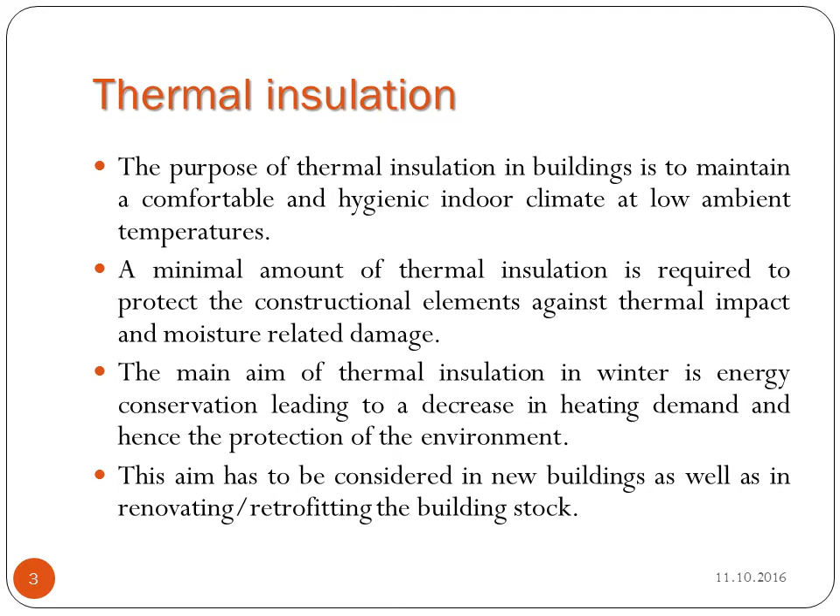Why is thermal insulation important for civil engineers and the public? Half of the energy we use to heat or cool our homes can simply leak out without insulation. Insulation helps to save money on energy bills, reduce energy use and lower greenhouse gas emissions, reduce reliance on heating and cooling systems, and finally, improve comfort.

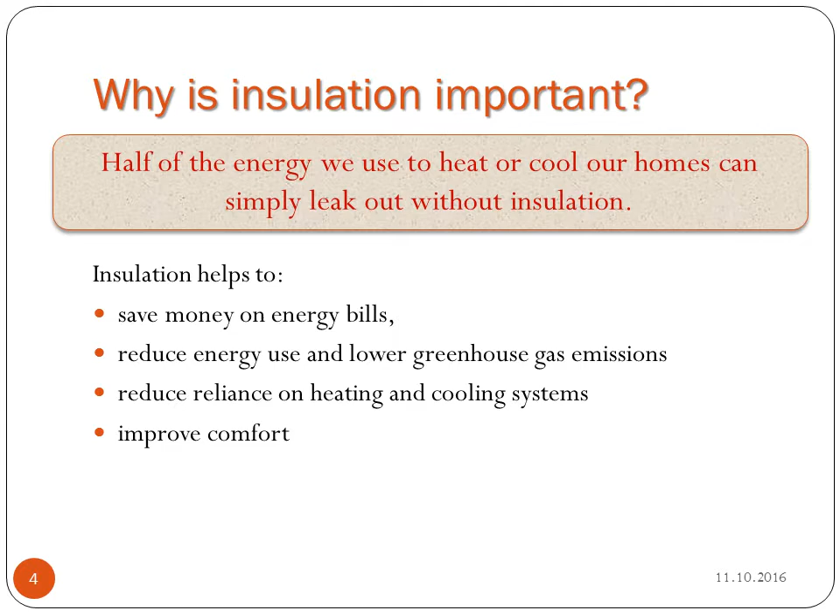Let's try to recall from the previous courses the terminology about heat transfer from materials. Thermal conductivity is a property of a material and is defined as the amount of heat energy transferred per unit thickness for a given temperature difference, expressed in watts per meter Kelvin. The lower this value, the more energy efficient is the material. However, the thermal conductivity of a material is affected by density, moisture, and temperature of the material. When the material is moisture saturated, the thermal conductivity is increased.

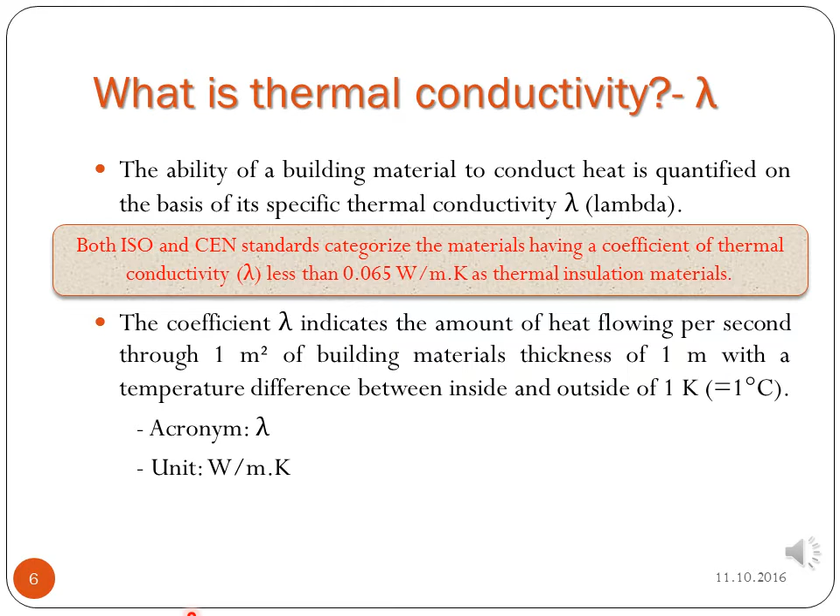The lower the coefficient lambda, the better is the insulating material.

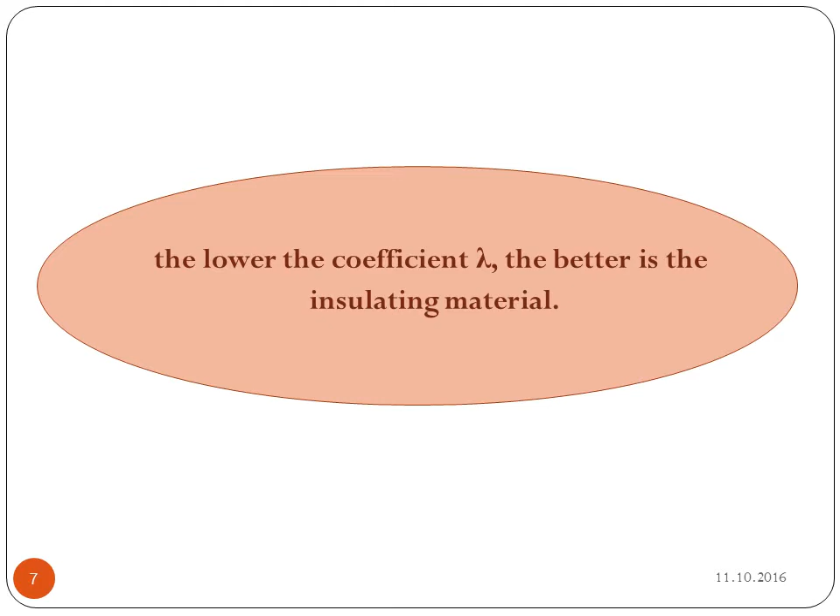As long as we understand the meaning of lambda, now it is easier to learn about the U values. If you did not catch the definition of lambda from the previous slides, please watch carefully again while taking notes. Now let's define the U value. U value is the measure of the rate of heat loss through a material for 1 degree difference in temperature at either side of the material.

As it can be understood from the definitions, thermal conductivity is a typical material property, while the U value can be calculated for structural members having different widths and/or for composite structural members made of different materials. The calculation of U values can be rather complex. The U indicates the flow of heat transferred from the inside out through an area of 1 square meter and a temperature difference of 1 Kelvin. Once again, the acronym is U and the unit is watt per square meter Kelvin.

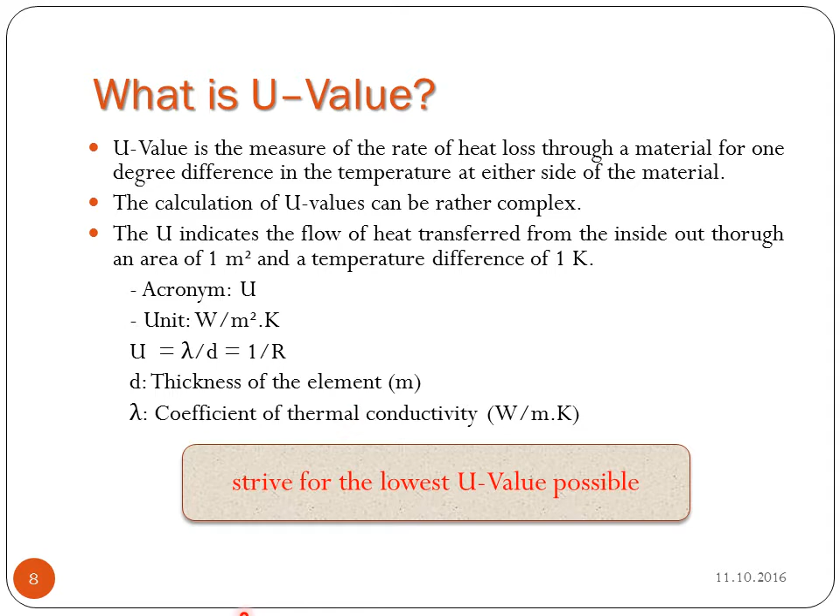That's a necessity for proper heat insulation. It is to strive for the lowest U value as possible. The lower the U element in the structure, the less is its heat loss.

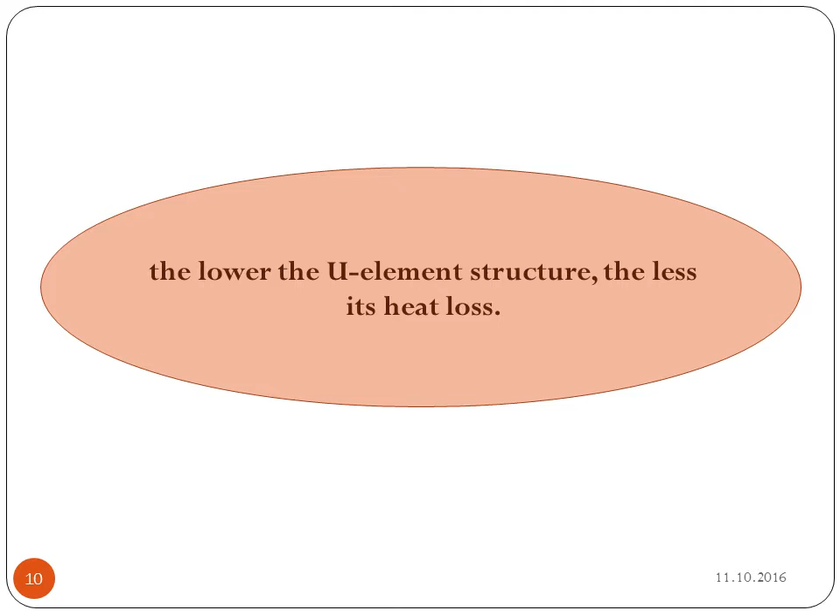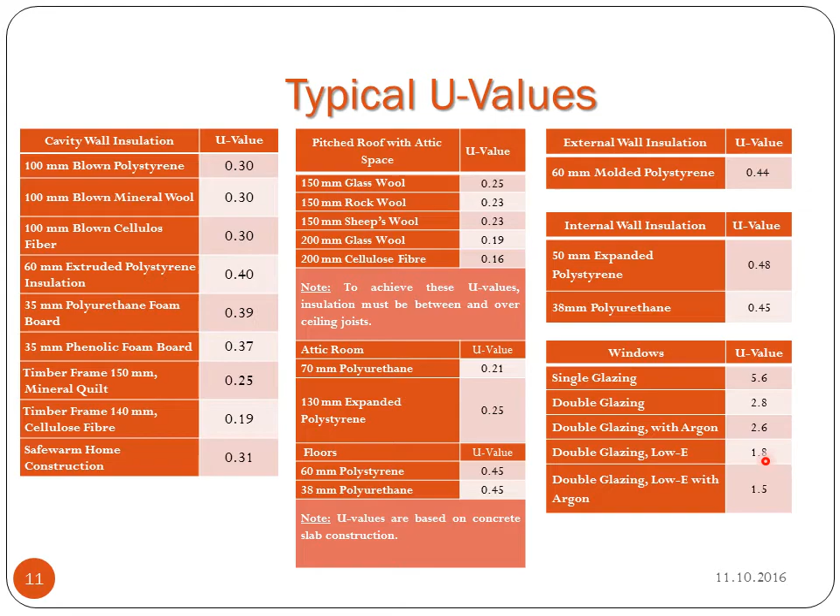Another important point to mention here is the high heat flow capacity of windows. You can see that the U value for single glazing is 5.6 watt per square meter Kelvin, while this value may be reduced up to 4 times by double glazing energy-saving argon types.

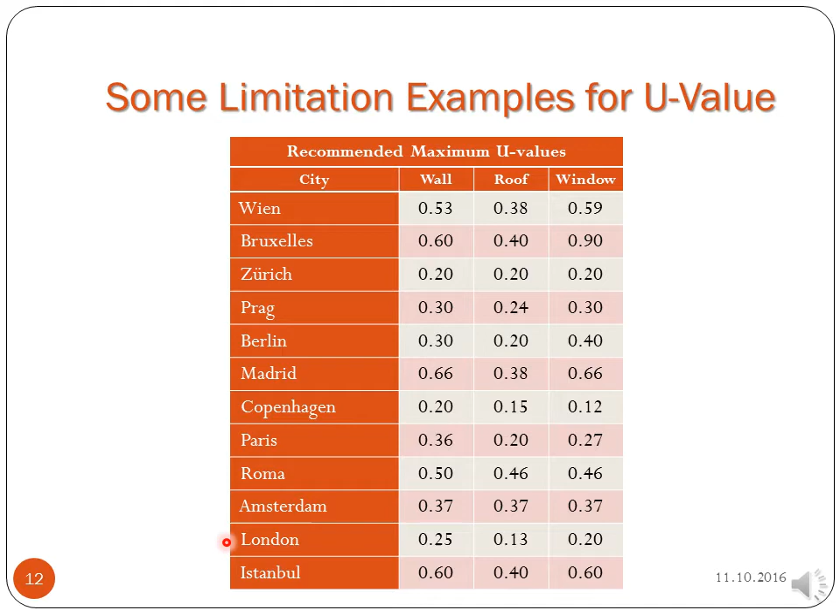Let's define the thermal resistance or R value for structural members. Within the building, there is a transmission of heat from the heated indoor air to the cold outside, for example, through the walls or through the roof. Insulation's ability to resist heat flow, preventing heat leaking in or out, is described as R value. Insulation products with the same R value will provide the same level of insulation if installed correctly. The level of insulation needed will depend on the type of building and the climate zone.

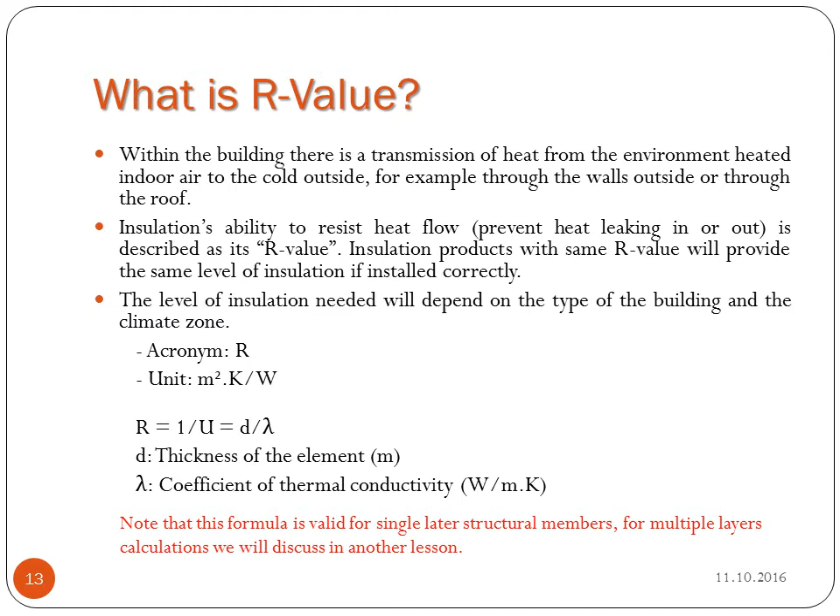Here you can see that thermal resistance is equal to 1 over U value, which is the thickness of the element divided by its thermal conductivity value. The thermal resistance has a unit of meter square Kelvin per watt, and the thickness of the element is measured in meters, and thermal conductivity is watt per meter Kelvin. This formula is valid for single structural members. For multiple layer calculations, we will discuss in another lesson.

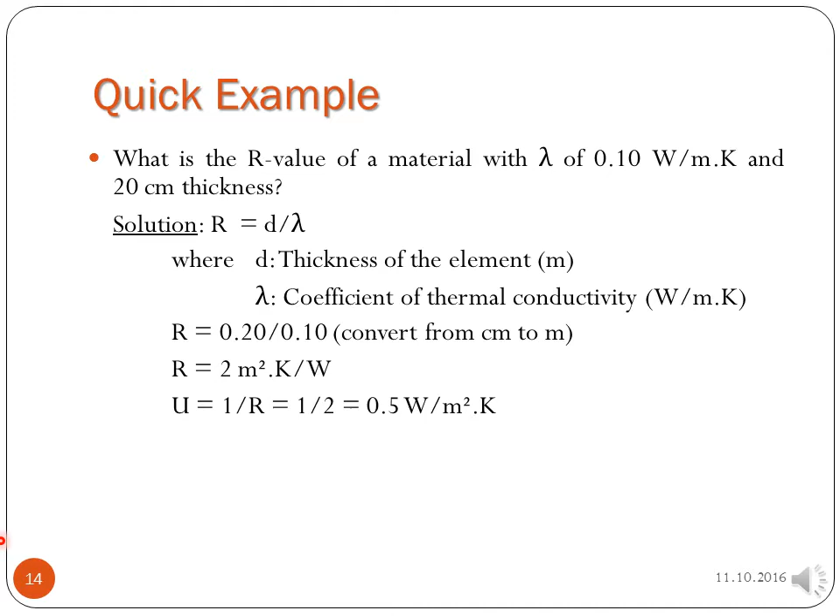Now it's a question of when to insulate buildings. The best time to install insulation is when you are building or renovating. Insulation should be combined with good design, including passive heating and cooling, so it can do its job properly, keeping you comfortable all year round.

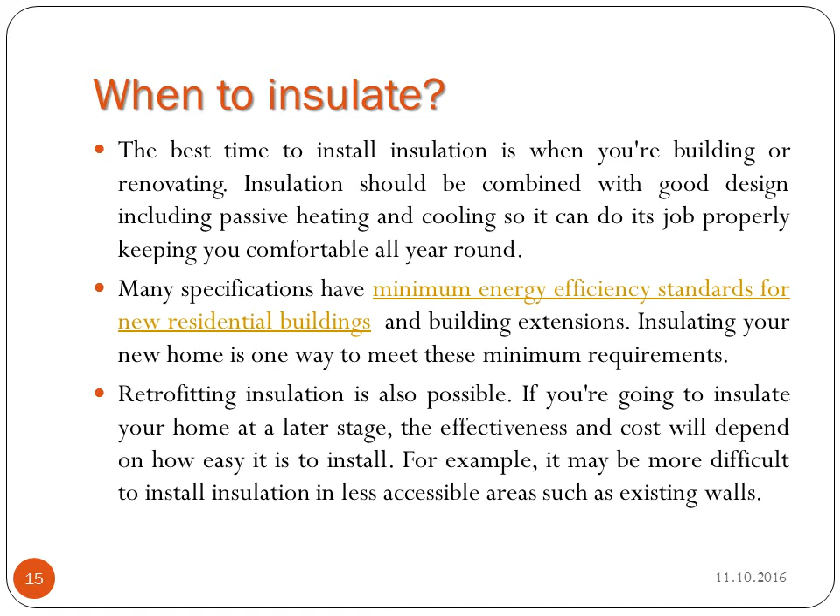Many specifications have minimum energy efficiency standards for new residential buildings and building extensions. Insulating your new home is one way to meet these minimum requirements. Retrofitting insulation is also possible. If you are going to insulate your home at a later stage, the effectiveness and cost will depend on how easy it is to install. For example, it may be more difficult to install insulation in less accessible areas, such as existing walls.

Now let's talk about, one by one, some typical insulation materials and their important characteristics.

How to choose the best material for insulation depends on the knowledge about the types of the materials, the intended use, and the type of construction, and of course, on economic considerations.

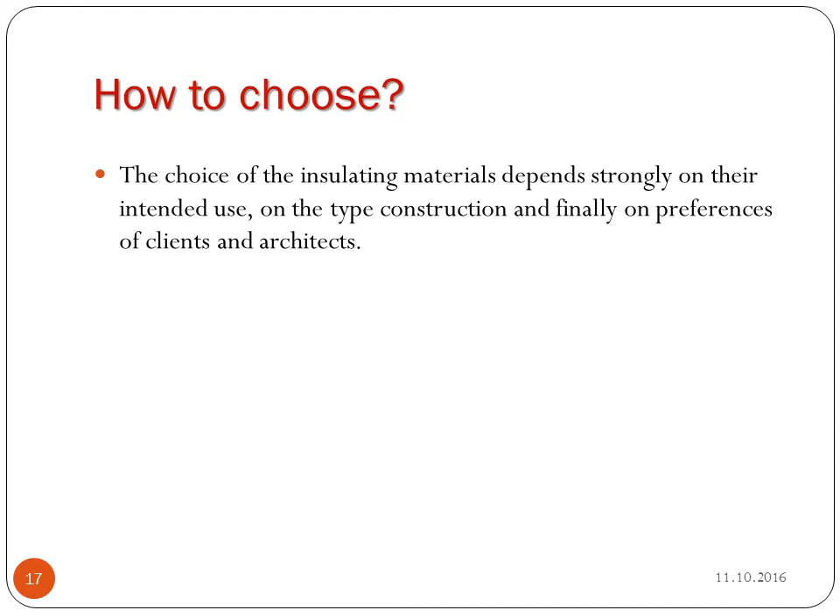Expanded perlite is used as a light granular insulation to fill cavities, such as insulation of cavities between the rafters or the insulation of ceilings, granular insulation under the concrete floor, and granular insulation of floors, filling padding between wood. Expanded perlite can also be used for the production of thermal insulation mortars and plasters.

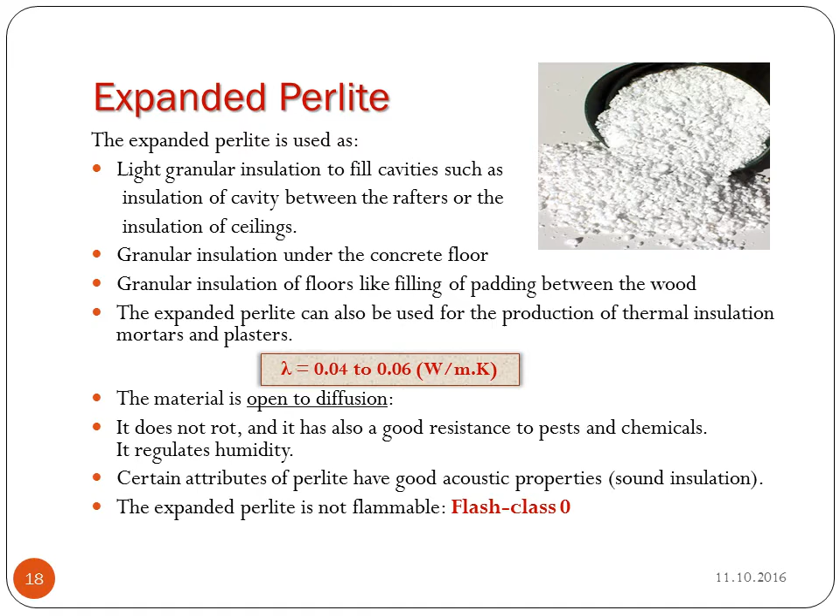Its lambda value is between 0.04 to 0.06. The material is open to diffusion. It does not rot, and it has good resistance to pests and chemicals. It can regulate humidity. Certain attributes of perlite give it good acoustic properties, making it a good material for sound insulation. Expanded perlite is not flammable.

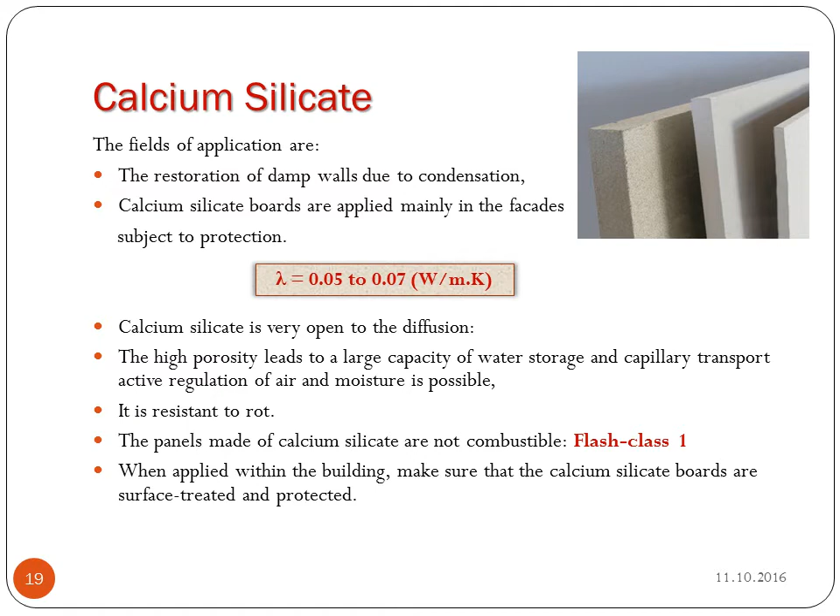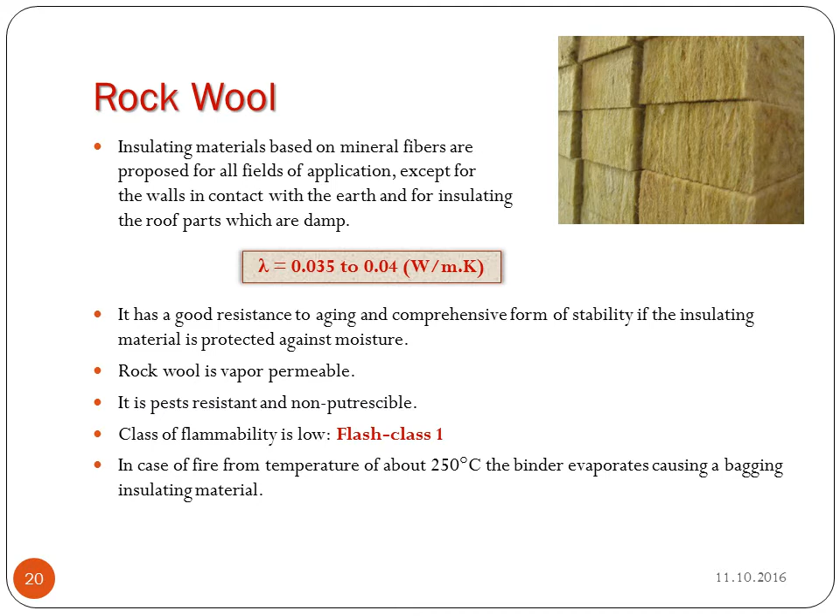Rock wool. Insulating materials based on mineral fibers are proposed for all fields of application, except for walls in contact with the earth and for insulating roof parts which are damp. Its lambda value is between 0.035 to 0.04 watts per meter Kelvin. It has good resistance to aging and comprehensive form stability if the insulating material is protected against moisture. Rock wool is vapor permeable. It is pest resistant and non-putrescible. Class of flammability is low. In case of fire, from a temperature of about 250 centigrade degrees, the binder evaporates, causing a sagging insulating material.

Basaltic rock wool. Thermal insulation of pipes, equipment, tanks, boilers, furnaces, fireplaces, and components of gas turbines are possible with basaltic rock wool. It also has a specific use in soundproofing industry. Its lambda value is between 0.038 to 0.055 watts per meter Kelvin. Class of flammability is low. The fibers of basaltic rock without a binder are combustible.

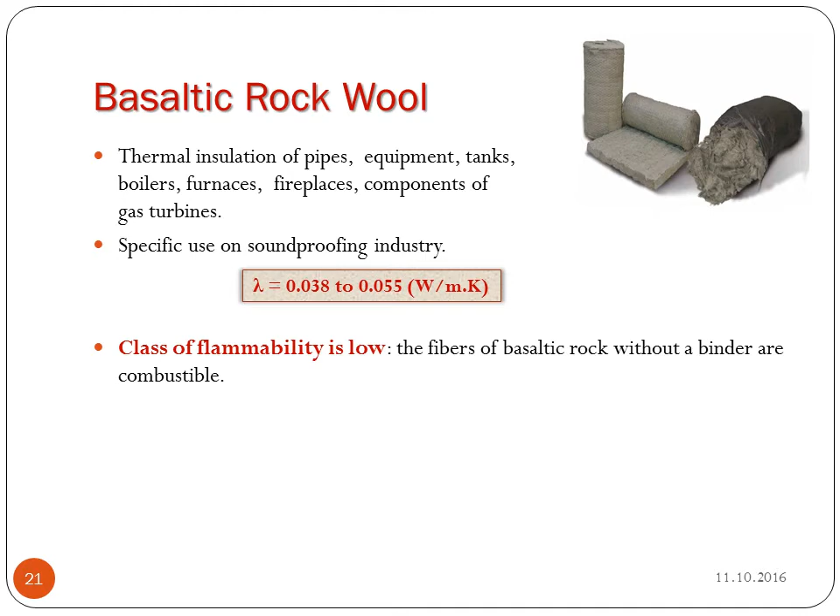Cellular glass. Cellular glass is particularly suitable for insulation of outside walls in contact with the ground, under the foundation, on terraces, or on flat roofs, and in general in all parts of the building susceptible to moisture. It's also suitable for internal insulation. Its lambda value is between 0.04 to 0.05 watts per meter Kelvin. It does not absorb any moisture. It's resistant to frost and weather conditions, and its compressive strength is high. The panels are relatively light and non-flammable, non-putrescible, and resistant to organic solvents and acids.

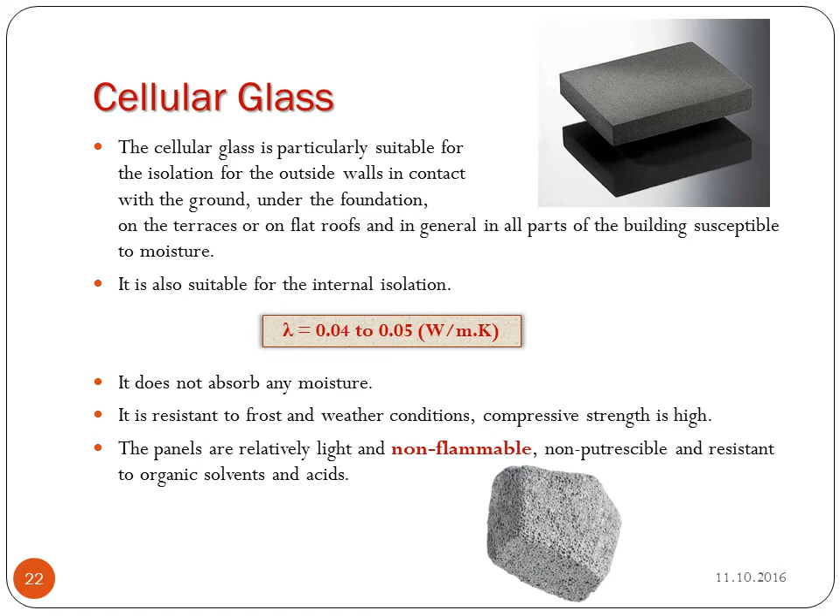Wood fiber panels are supplied in thicknesses from 10 to 100mm for internal or external use. It's open to diffusion and its installation is quite fast. Insulation panels are used for insulation above or between the rafters of the roof, wall posts, wooden beam ceilings, and walls for suspended facades and partition walls. Compared with other insulation materials, it results in a higher capacity of storing heat. Its soundproofing properties are appreciable. In points at high risk of moisture, wood fiber panels having hydrophobic properties are preferred, with the addition of natural resin rather than bitumen. It's flammable.

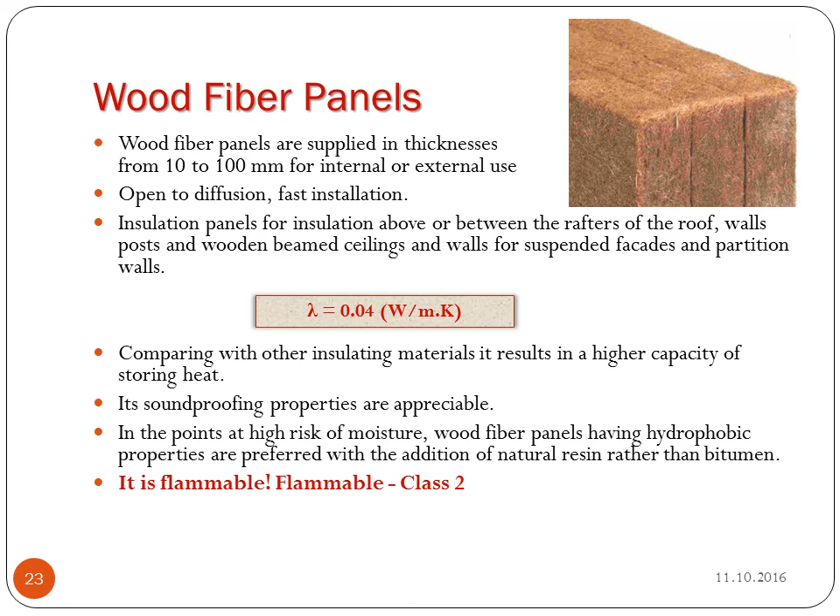Cork. The cork is obtained from the bark of the cork oak. Today, insulating panels are made of cork only in pure expanded version, that is, without addition of other substances.

The cork bark is minced, and the granules are then baked in special tanks with high vapor water pressure and temperature of about 370 centigrade degrees.

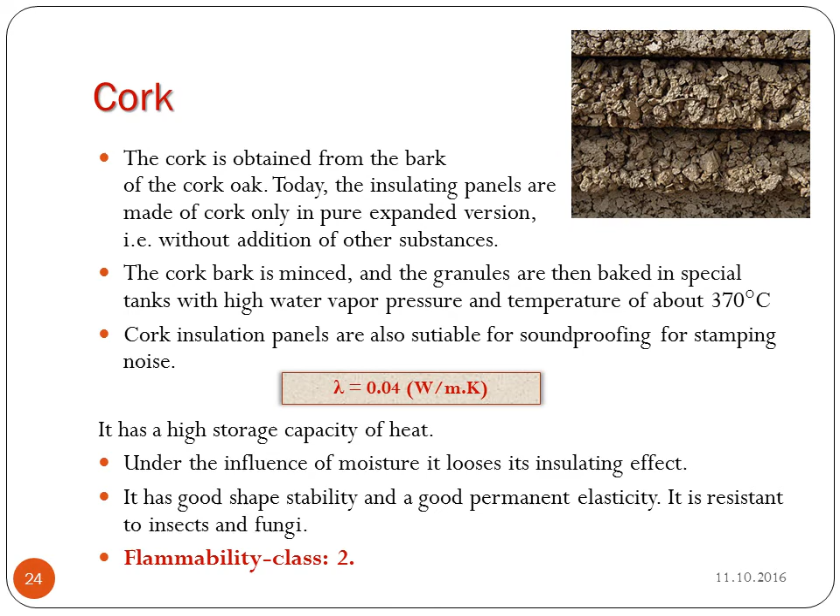Cork insulation panels are also suitable for soundproofing or for stamping noise. It has a high storage capacity of heat. Under the influence of moisture, it loses its insulating effect. It has good shape stability and good permanent elasticity.

Hemp. Suitable virtually for all common applications.

Insulation panels are for the facade. Insulation panels and mats for thermal insulation in walls, pillars, ceilings with wooden beams, roofs and suspended ventilated facades.

Infill material for filling cavities like hemp ropes for joints of windows and doors. Soundproofing panels under the floor covering. Bulk fragments of hemp as insulation fill for padding.

Its lambda value is 0.04 and hemp fiber absorbs moisture up to 1/3 of its net weight and dries with no leakage. It also has a high capacity of storing heat compared to other insulating materials made of mineral fibers, like glass wool or rock wool.

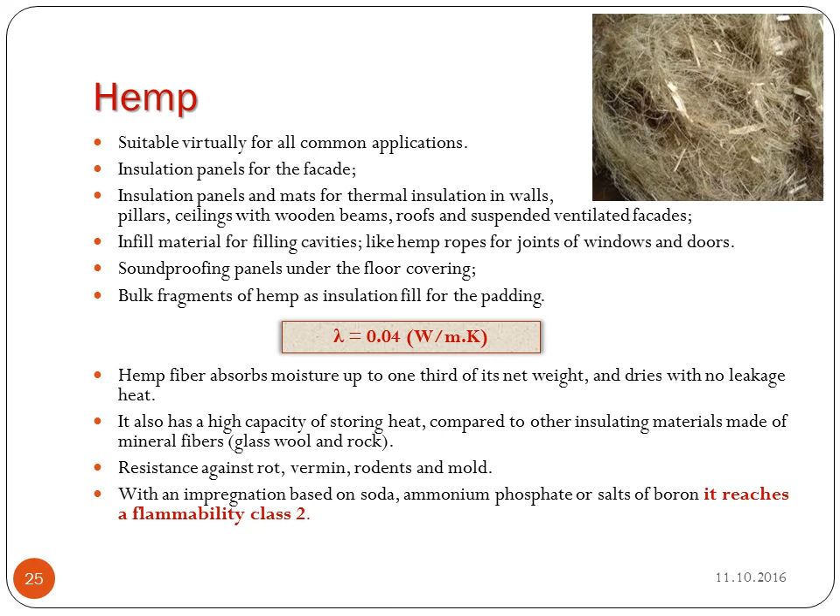Resistant against rot, vermin, rodents, and mold. With an impregnation based on soda, ammonium phosphate, or salts of boron, it reaches a flammability class of...

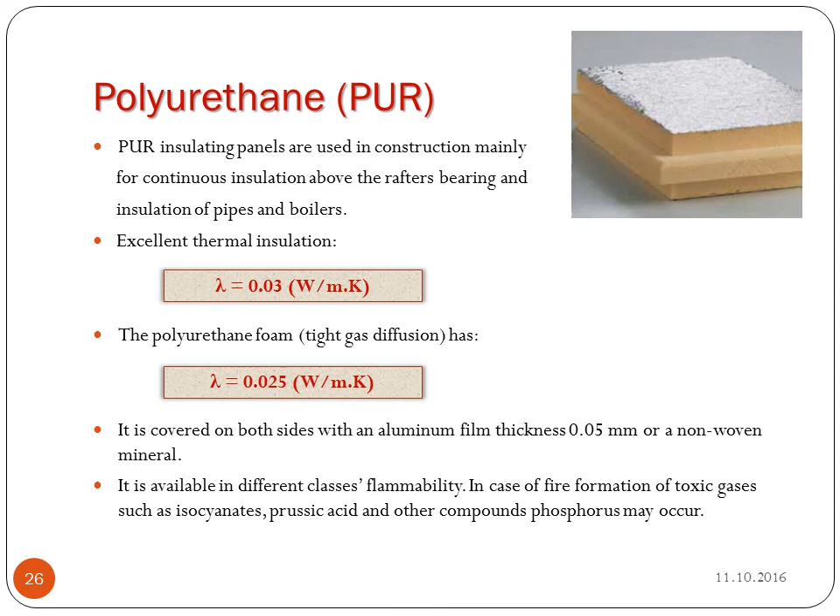It's available in different flammability classes. In case of fire, formation of toxic gases such as isocyanates, prussic acid, and other phosphorus compounds.

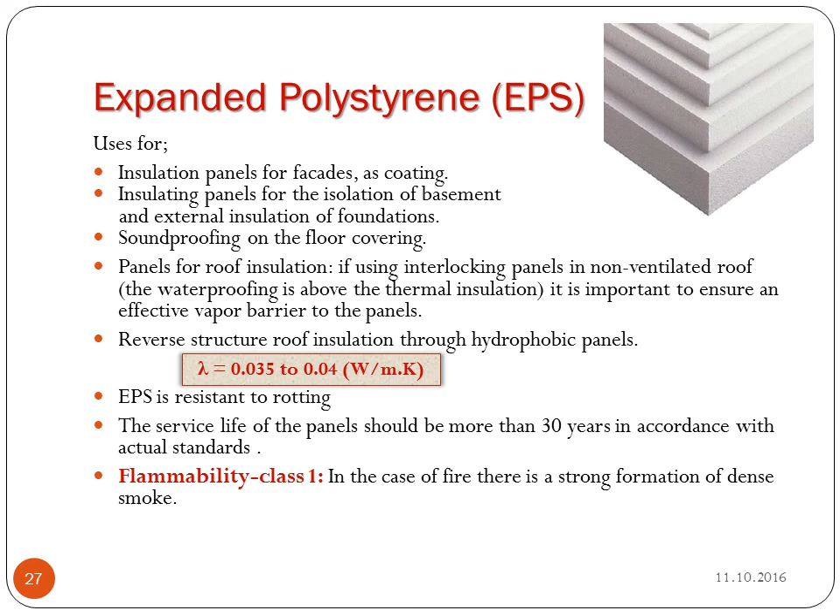Its lambda value is between 0.035 to 0.04. EPS is resistant to rotting. The service life of the panels should be more than 30 years in accordance with actual standards. Its flammability class is 1, so in case of fire there is a strong formation of dense smoke.

Extruded polystyrene, XPS. The extruded polystyrene is used for applications in wet ambient conditions. It's used for roof insulation, panels, green roofs with terraces and floors. It's also used for panels for the outer insulation against the ground.

The extruded polystyrene panels in this application are glued to outer vertical waterproofing. To protect them and to facilitate the discharge of water on the outside, a drain membrane can be applied. Its lambda value is between 0.035 to 0.04.

The absorption of water is extremely small because of the expanded closed cell structure and the expansion of the film on both sides of the panel. Its compressive strength is high and it has flammability class 1.